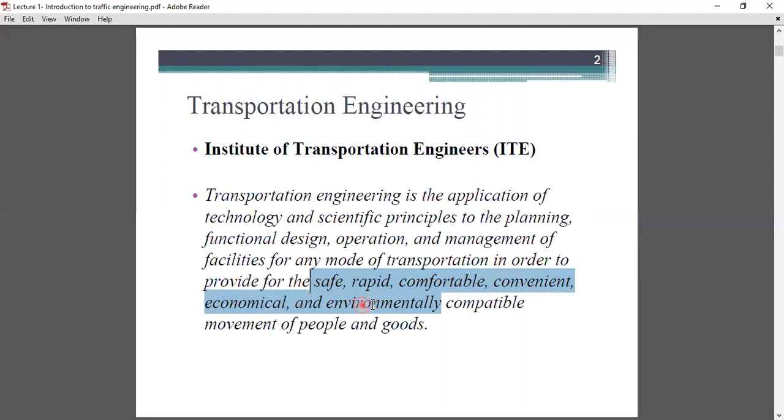We are not talking about just road transportation, land transportation, water transportation, or air transportation, but any mode of transportation. This application of scientific principles is carried forward in order to provide safe, rapid, comfortable, convenient, economical, and environmentally compatible movement of people and goods.

So we are studying traffic engineering. What is traffic engineering? Traffic engineering is the phase of transportation engineering which deals with the planning, geometric design, and traffic operation of roads, streets, and highways, the network, terminals, abutting lands, and relationship with other modes of transportation.

Traffic engineering is nothing but a kind of subdivision of transportation engineering which deals with the planning, geometric design, and traffic operation of roads - arterial roads, highways, national highways, state highways, major roads, district roads, any mode of roads, street and highway networks, terminals, abutting lands, and the relationship with other modes of transportation.

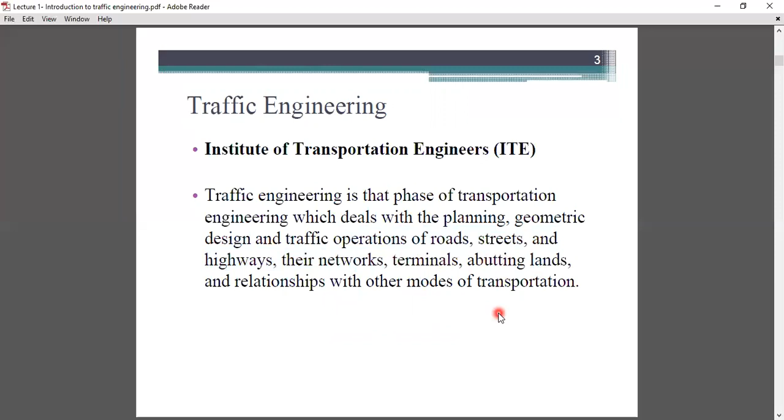So there are different types of transportation modes available: road network, rail, air, maritime, or pipeline. Pipeline is nothing but commuting or moving fuel or liquid from one place to another place - it's a kind of transportation. But there are four main types of transportation: road, rail, air, and maritime, or in simple terms, waterways, or water transportation.

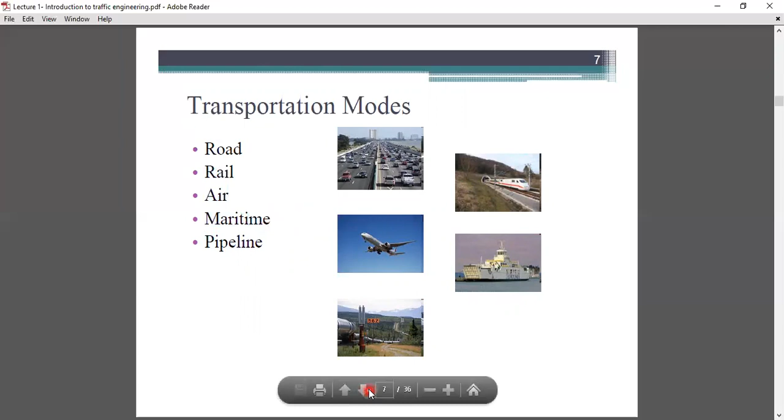Next is transportation modes. There are different types of transportation modes which we studied in the urban transport system, like automobile, taxi or for-hire vehicles, local bus transit, express bus transit, paratransit, light rail, heavy rail, ferry, intercity people transportation system, urban and intercity freight transport system. These are the different types of transportation which we studied in the previous subject, urban transportation system, and what modes are available for transportation.

So just give a fresh look at that kind of categorization: urban people transportation, intercity people transportation system, automobile, intercity railroad, airways, waterways, and urban and intercity freight transportation.

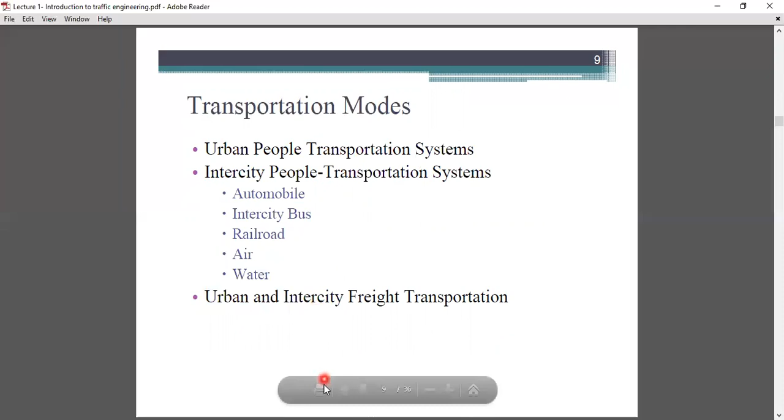So what is traffic engineering? Why are traffic engineers needed, or why is there a subdivision in transportation engineering named traffic engineering? There are three types of professional aspects: relationship with the general public, relationship with elected officials, and professional ethics. There are different types of relationships with general people, elected officials like government authorities and local urban bodies, and the profession with ethics.

Ethics depends on the person, or maybe it differs. Safety - this is the primary objective of any traffic engineer. The principal goal of the traffic engineer remains the provision of a safe system for highway traffic.

Here is some statistics: 26,000 fatalities in Iran, 40,000 to 43,000 fatalities in the US - something like a civil war - where each and every day fatal accidents occur on the road. So the primary objective of the traffic engineer is nothing but safety.

The objective of safe travel is always number one and is never finished for the traffic engineer. It is not that it's a shift of just providing safe travel for a small period of time, but it is never finished work for the traffic engineer.

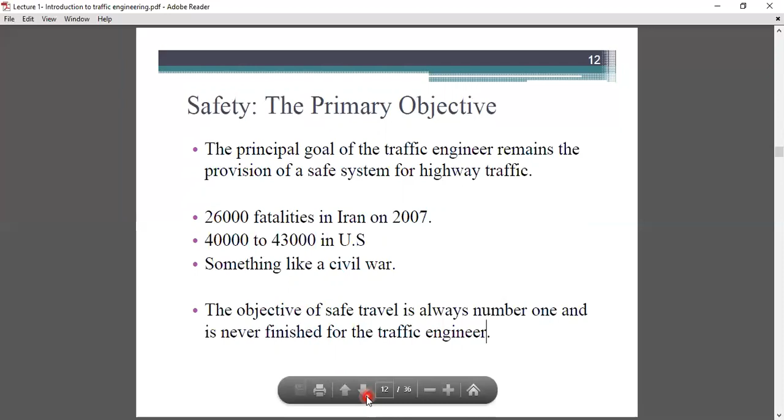Other objectives of the traffic engineer are to provide speed, comfort, convenience, economy, and environmental compatibility for the construction of roads, as well as sustainable roads.

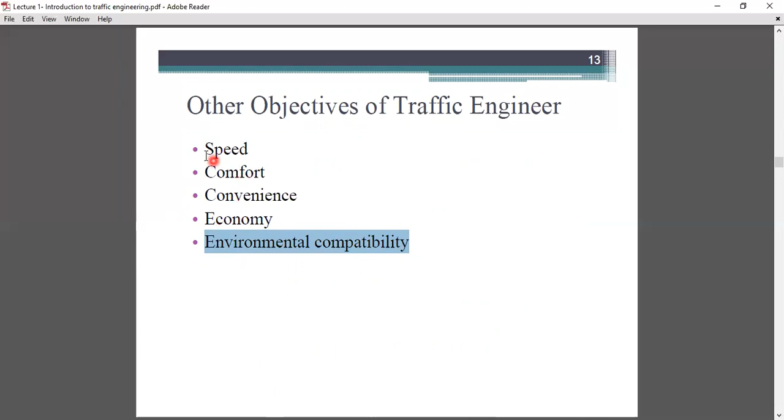There are different objectives like speed, comfort, convenience, economy, and environmental compatibility. While speed of travel is much to be desired, it is limited by transportation technology, human characteristics, and the need to provide safety.

There are different types of characteristics available, like human characteristics as well as vehicular characteristics. In human characteristics, we probably know the PIEV theory - perception, intellection, emotion, and volition time theories. These different types of human and vehicular characteristics are to be included in traffic engineering.

Comfort and convenience are generic terms and mean different things to different people. Comfort involves the physical characteristics of the vehicle and roadways and is influenced by our perceptions of safety. So comfort, convenience, and the desire for speed differ for different people.

Some people want higher speed rather than comfort, but some choose comfort as a primary concern. So comfort, convenience, and desire for speed differ for different people. Convenience relates more to the ease with which trips are made and the ability of the transport system to accommodate all our travel needs at appropriate times.

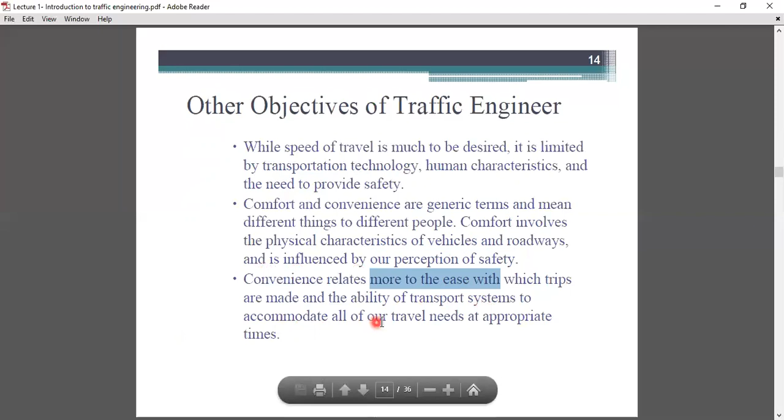Economy is also relative. There is little in modern transport systems that can be termed cheap. We all know that road networks or any transportation infrastructure involves huge capital investment. Economy is relative, and due to modern practices, modern technology, and modern equipment, there is high capital investment going through.

Highway and other transportation systems involve massive construction, maintenance, and operating expenditure, most of which is provided through general and user taxes and fees. Nevertheless, every engineer, regardless of discipline, is called upon to provide the best possible system for the money - so the other concern is to provide economic feasibility.

If you are hired as a traffic engineer at NHAI, National Highway Authority of India, your primary concern is to provide a safe, convenient, comfortable, economically feasible, and environmentally friendly plan or road network for the general people and for the country. It is the duty of every engineer to suggest the best possible system for the money.

Harmony with the environment is a complex issue that has become more important over time. All transportation systems have some negative impacts on the environment - all produce air and noise pollution in some form, and all utilize valuable land resources. So with the environment, it is a more complex structure.

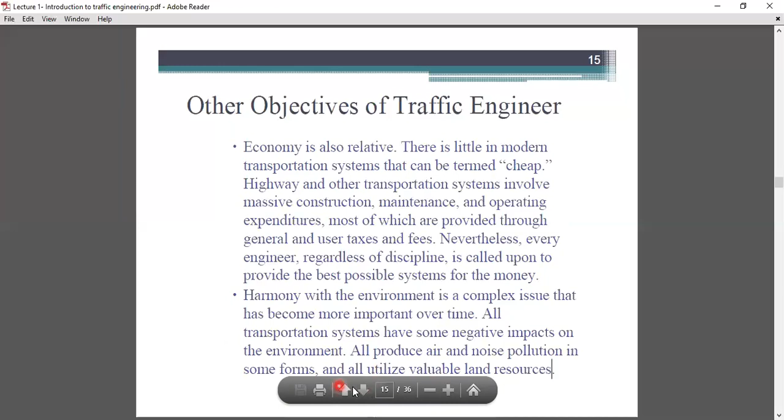Elements of the transport system include different types: facilities, vehicle, control system, users, and environment. Facilities refers to what kind of facilities are available - for example, if we are talking about BRTS, the bus system, bus stands are called facilities that users are going to use.

Next is vehicle. If you're talking about BRTS buses, as we know, all the BRTS buses are now converted into AC buses, so there is higher comfort and convenience than in the past. This type of element or characteristic falls into that particular category.

Thereafter, the control system - the proper scheduling, maintaining, and managing of the particular road network or BRTS network is hectic work, so it should be considered one of the major elements in the transportation system. Thereafter, users - those who use that particular system with proper ease of comfort and convenience.

Last but not least, the environment. As we all know, every system or everything humans build is going to affect the environment in both positive and negative manners. So harmony with the environment means providing solutions that minimize the chances or impact on the environment. It is a major element. So there are five different major elements of the transportation system: facilities, vehicles, control system, users, and environment.

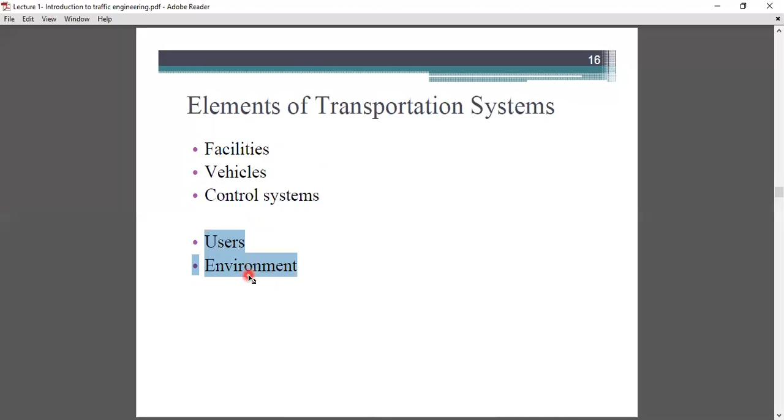Okay, so there are the different types of the elements of the traffic engineering. So in the past we are talking about the elements of the transportation engineering, but right now elements of the traffic engineering. So traffic studies and characteristic, that how the current situation occur, or how it will affect in the nearness of future, or the prediction work that in the next 5 or 10 years, how the traffic are available, or what congestions occur at that particular time.

Next one is a performance evaluation. Performance evaluation is nothing but providing how the particular system will work to the users, or what kind of difficulties or problems are going to occur.

Next one is a facility design. Facility design is nothing but developing a road that reduces the number of fatal accidents, as well as reduces the queues at the signals, or reduces the traffic congestion at that road. So facility design has a more impact in traffic engineering.

Next one is traffic control. There are different types of traffic control parameters or methodology used, like sign boards, markings, signals, bumpers. So this kind of traffic control devices or methodology are used in that particular domain to just optimize or utilize the best out of it.

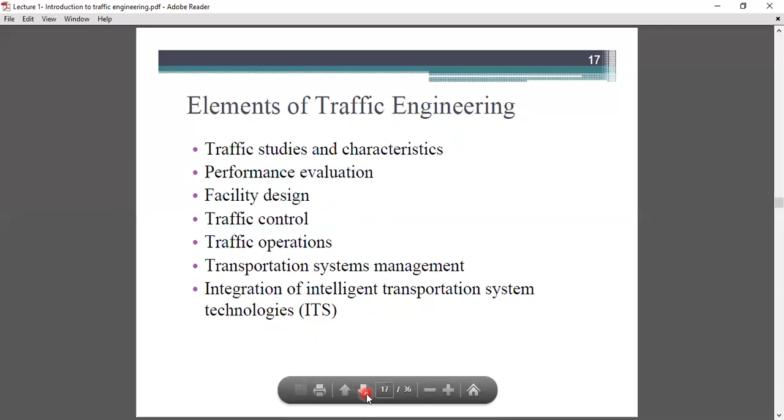Okay, so first one is traffic studies and characteristics, involving measuring and quantifying various aspects of highway traffic. Studies focus on data collection and analysis used to characterize traffic, including traffic volumes and demand, speed and travel time, delay, accidents, origin and destination, modal use, and other variables.

So this kind of survey which we do in traffic studies, like traffic volumes and traffic demand - how the travel demand is going to affect that particular region. What are the trip generation ratio, trip distribution ratio, trip attraction ratio, and the modal split - which modes people are using for their day-to-day commute.

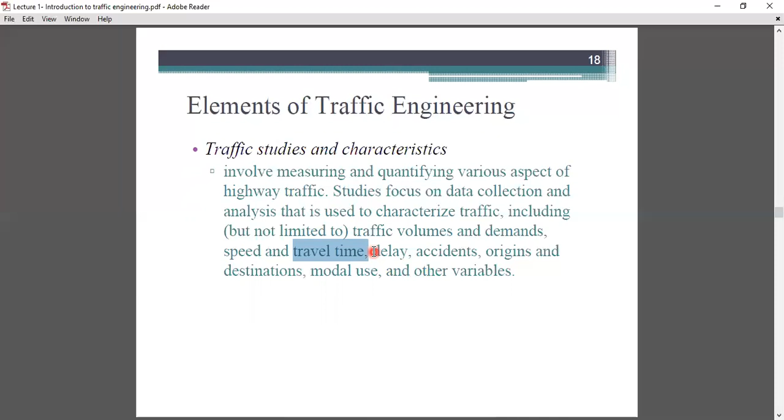So speed and travel time, delay, accidents, the number of fatal accidents, and various other data collection are needed, and analyzing that particular data helps identify how traffic is characterized in the current situation as well as in the next 5 or 10 years.

Next is performance evaluation, which means the way traffic engineers can rate the operating characteristics of individual sections of the facilities and the facility as a whole in relative terms. Such evaluation relies on measures of performance quality, and is often stated in terms of the level of service. So level of service is a different portion.

So the Ministry of Urban Development publishes the LOS booklet every 2 years, and LOS is a classification of the level of service, or a rating system of that particular service used by the general people. So performance evaluation is a kind of system in which people rate that particular system, how it affects their day-to-day life, what are the comfort and convenience, and how safe the system is.

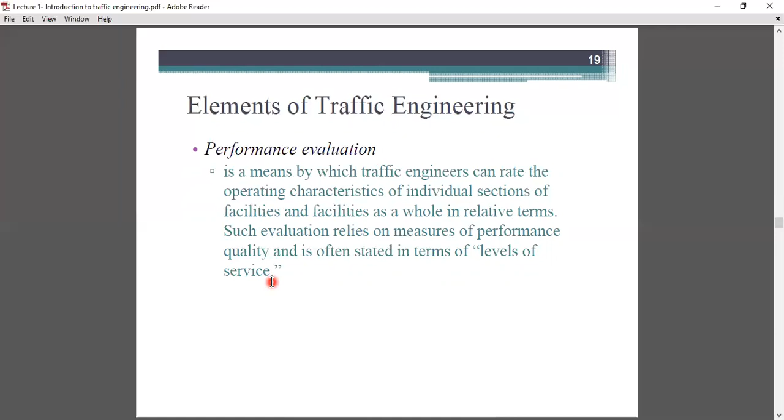Next is facility design. Facility design involves the traffic engineers in the functional and geometric design of the highway and other traffic facilities. Traffic engineers per se are not involved in the structural design of the highway facilities, but should have some appreciation for the structural characteristics of the facility.

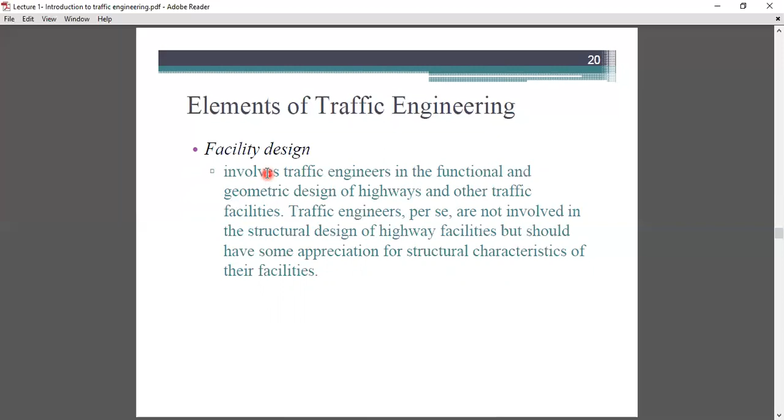So in traffic engineering, we are not concerned about the structural characteristics of the highway, like whether it is a rigid pavement or flexible pavement, or the thickness of the base layer and sub-base layer. But it involves appreciation, or just a suitable solution, to the structural designer who designs the pavement for that highway, whether national highway or state highway. So in facility design, traffic engineers only focus on how it will affect day-to-day users.

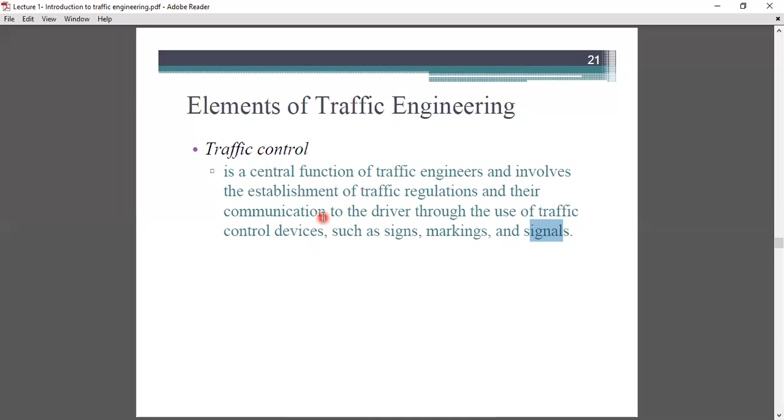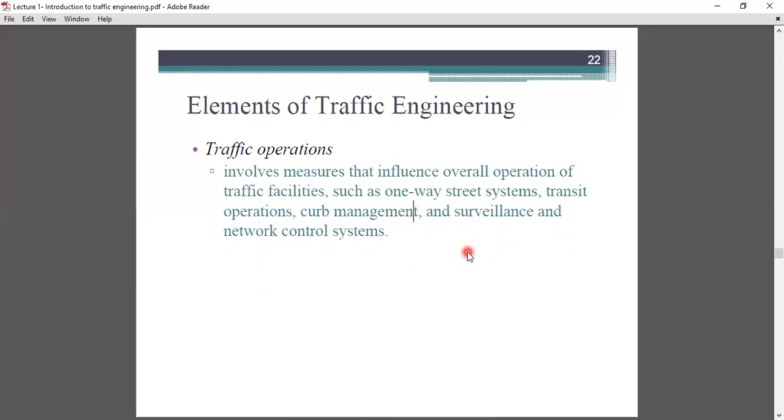Next is traffic operation. It involves measures that influence overall operation of traffic facilities, such as one-way street systems, transit operation, curb management, and surveillance and network control systems. In traffic operation, different types of operation methodologies are used, particularly for preventing excessive vehicles going through a particular street, such as one-way street systems, transit operation, curb management, and surveillance and network control systems.

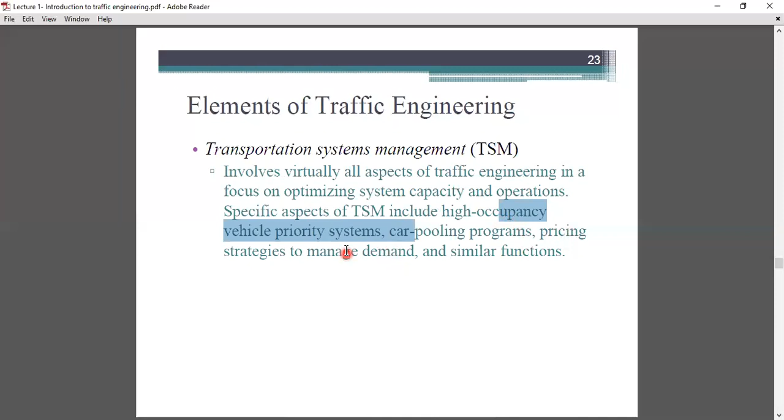The next one is transportation system management, which involves virtually all aspects of traffic engineering, focusing on optimizing system capacity and operation. Specific aspects of TSM include high occupancy vehicle priority systems, carpooling programs, pricing strategies to manage demand, and similar functions. The TSM framework works on vehicle priority systems, high occupancy vehicle priority systems, carpooling systems, pricing strategies to manage travel demand as well as traffic demand, and similar functions.

The next one is intelligent transport systems, which refers to the application of modern telecommunication technology to the operation and control of the transportation system. Such systems include automated highways, automated toll collection systems, vehicle tracking systems, in-vehicle GPS and mapping systems, automated enforcement of traffic lights and speed laws, smart control devices, and others.

But intelligent transport systems are a kind of very costly infrastructure, so they are not used frequently. But due to technological advancement in the field of transportation or traffic engineering, there are still few upgradations and improvements going on in that particular phase. In the very near future, as we've said, in the next 5 or 10 years, we will see these kinds of systems being used very frequently for day-to-day commute.

So there are different elements of traffic engineering. First is transportation demand. We had discussion in urban transportation systems about what transportation demand is and the difference between mobility and accessibility. So let's take a quick look at that.

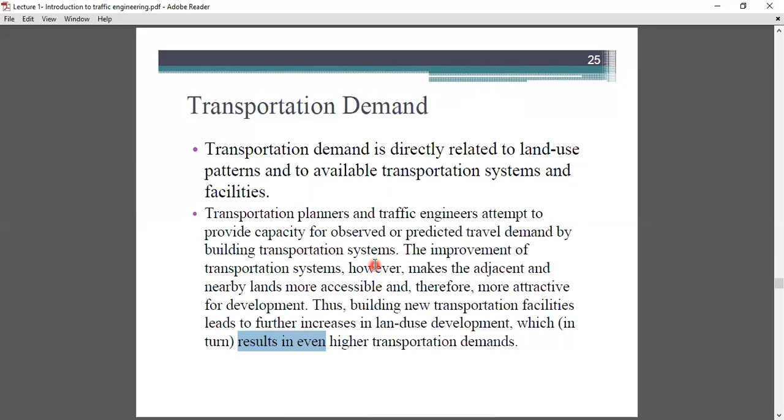So just to obtain that kind of travel demand, the first step of the travel demand is to create an O&D survey, origin and destination surveys.

So this is the transportation demand. It's connected with the transportation facility, it's connected with land use, and it's also connected to the transportation demand.

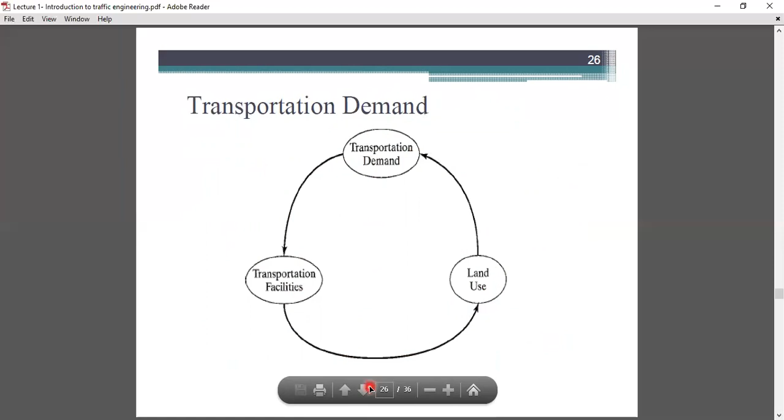So the next one is mobility and accessibility. So what is mobility and what is accessibility? In very simple terminology, accessibility is nothing but access to the activity.

And what is mobility? Mobility is nothing but access to movement. So accessibility is access to the activities. Like if we are talking about any bus transportation system, how frequently you can reach that bus stop is called accessibility. If a bus stop is near your home, say within a 5 minute distance, there is high accessibility available in your area. So accessibility is access to the activities, and mobility is access to that movement.

So when you reach that particular bus stop, how fast you will get a bus for ridership is called mobility. So it is very much connected with each other, mobility as well as accessibility.

Mobility gives travelers a wider range of choice as to where to go to satisfy particular needs. Mobility allows a shopper to choose from among many competing shopping centers and stores. Accessibility is a major factor in the value of land. When land can be accessed by many travelers from many potential origins, it is more desirable for development and therefore more valuable. Thus, proximity of land to major highways and public transportation facilities is a major factor determining its value. So accessibility is access to the activities, and mobility is access to the movement.

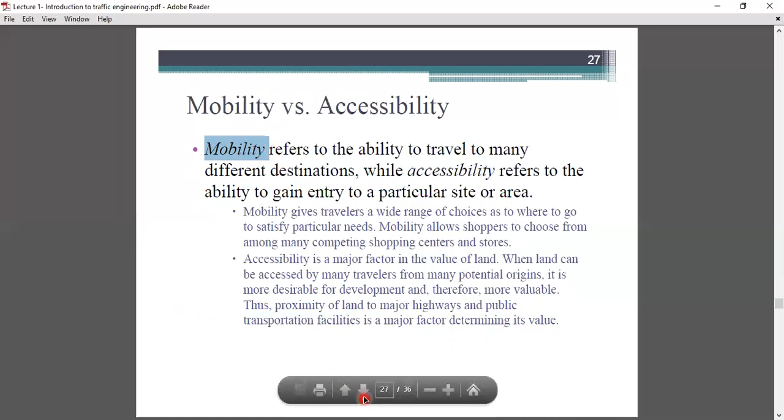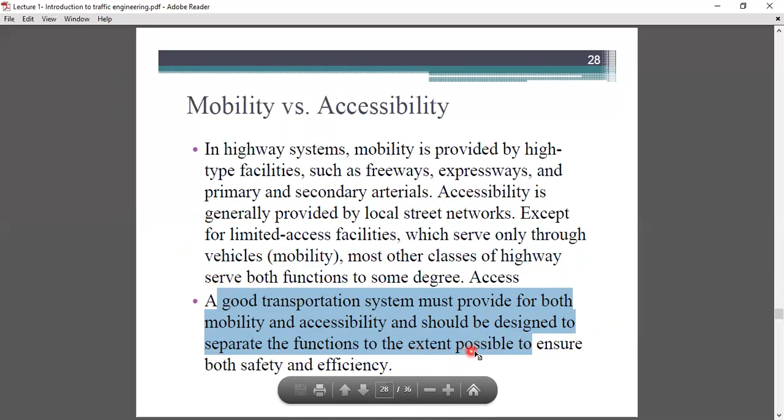In the highway system, mobility is provided by high type facilities such as freeways, expressways, and primary or secondary arterials. Accessibility is generally provided by the local street network, except for limited access facilities which serve only through vehicles. Most other classes of highway serve both functions to some degree. A good transportation system must provide for both mobility and accessibility, and should be designed to separate these functions to the extent possible to ensure both safety and efficiency.

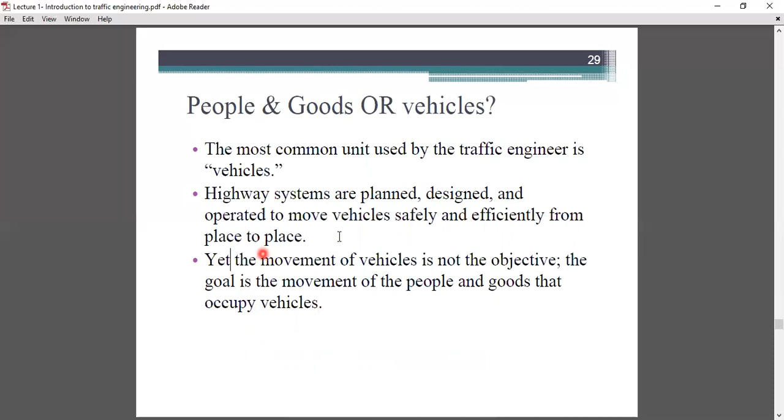People and goods, or vehicles. The most common unit used by the traffic engineer is the vehicle. Highway systems are planned, designed, and operated to move vehicles safely and efficiently from place to place. Yet the movement of vehicles is not the objective itself. The goal is the movement of the people and goods that occupy the vehicles. So the main goal is the movement of people from one location to another, or the movement of goods from a home industry to the port, or from one industry to another. These are the main goals of the traffic engineer.

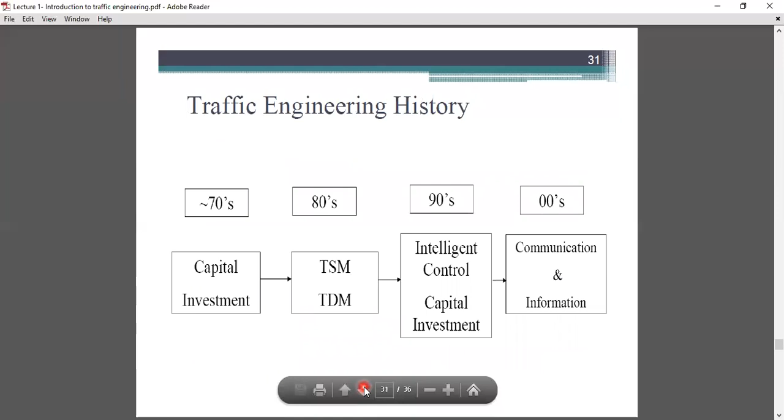So in TSM, transportation system management, there are two types of fundamental approaches available: facility design and traffic control. Facility design involves adding lanes, removing bottlenecks, bridges and tunnels, revising geometry to increase speed, or providing super elevation to smoothen curve formation, or vehicle improvements to reduce headways. Traffic control involves ramp metering, signal coordination, signal phase sequences, left turn treatments, parking restrictions, and these types of suggestions or solutions are adopted worldwide. TSM is discussed in the sixth semester urban transportation system course.

If you have any queries, please go through that particular theory so that you can easily understand what TSM is. So this is the very first lecture of traffic engineering, the basic introduction of what traffic engineering is and what a traffic engineer does in the real world.